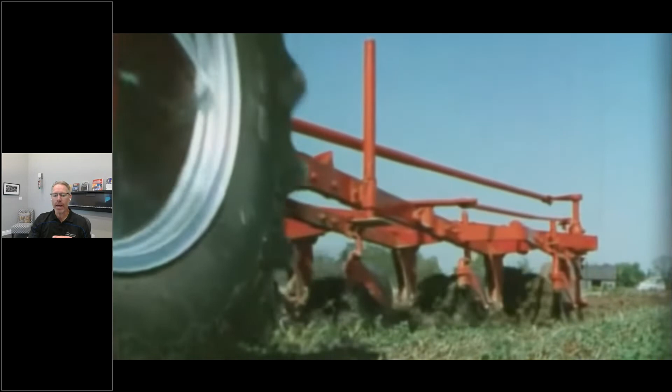My name's Alan Rienstra. I'm the Director of International Business at SDT. In my career, ultrasound is the only thing I've ever done. After 31 years, I imagine it's all I'm ever going to do. My love affair with ultrasound began back in 1991, and this would be the first time I ever picked up an ultrasound detector. It was an old SDT 150, and incredibly, these things are still out in the market being used 30 years later. I used that thing to listen to the intake valves inside the Perkins diesel engine of my dad's tractor.

The next 30 years I've just had amazing discoveries. New applications just keep developing for this versatile technology. Today my passion for ultrasound is going through a bit of a transformation. I don't spend so much time in the field anymore doing sales, but I put a lot of my accumulated knowledge to work developing courses, making presentations like this one, and helping you get the most from this technology that creates safe workplaces, reduces unplanned downtime, eliminates wasted energy, and helps us all create that elusive culture of reliability that everybody wants for their organization.

Machinery lubrication remains the single biggest factor affecting asset reliability today. If you speak to experts on the subject, or look it up on the web, or attend a conference, you'll hear most experts cite that as much as 40 to 80% of bearing failures are rooted in poor lubrication practices.

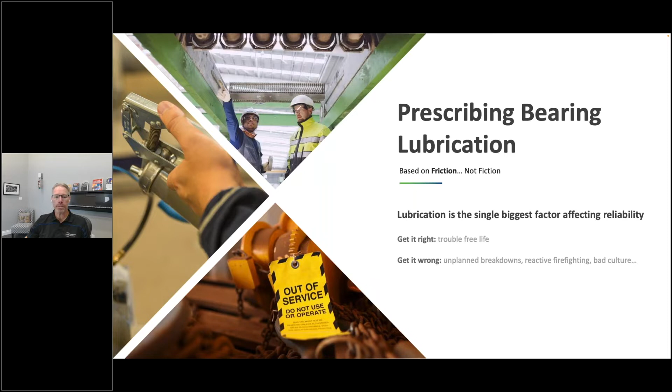Getting this one proactive task right can contribute to a long, trouble-free life for your bearings. But if you get it wrong, and so many of us do, you can expect unplanned breakdowns, reactive firefighting, your resources will get quickly drained, and a culture of unreliability will spread throughout your organization. There's nothing worse than an unreliable culture, because it is the single hardest mountain for any organization to try and move.

And so here begins my story. I like to use once upon a time because everybody loves a good fairy tale. Once upon a time is a great way to begin a tale that can recapture our memory of days that seem long ago and forgotten.

But it's not all that long ago when our lube technicians were considered the mechanical gurus of the facility. With precision, these old timers would inject the oily lifeblood into the assets so critical for manufacturing. They were the first responders, but their job wasn't to fix and repair because they weren't always in reactive mode. Their job was to maintain. These were the people that had their finger on the pulse of the plant, and they knew when an asset was healthy, and had a sixth sense for when trouble could be looming.

But gradually these gurus disappeared and they weren't replaced. Coincidentally, it happened at about the same time that manufacturing industries were making the transformation from time-based maintenance tasks to maintenance tasks driven by condition-based evidence. Many plants began using vibration analysis and infrared thermography to predict when machines might fail. But what they overlooked was the fact that lubrication is actually the earliest signal that their bearings were failing.

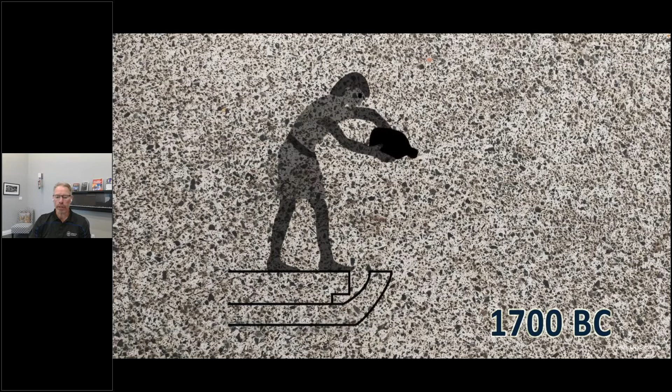So what was their evidence? Their evidence was friction. There was an increase in friction. It became too hard to push the sledge, so they just poured more oil in it. We could build a flimsy argument that the Egyptians actually invented condition-based lubrication. They didn't invent ultrasound. They didn't know it existed.

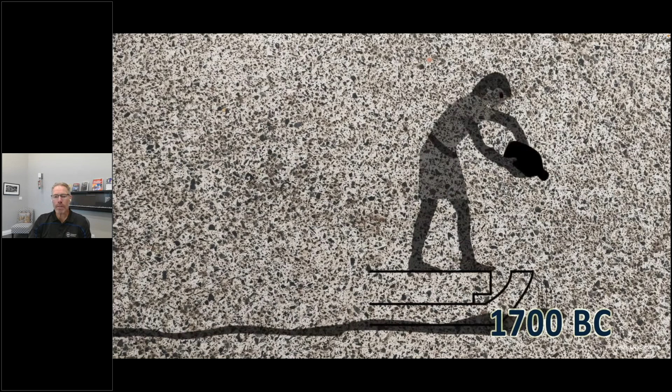What happened 4,000 years ago to now? We just stopped using it. When non-lubricated or improperly lubricated surfaces come in contact with each other, friction is created. And in many cases, this friction is an energy waster, as well as a heat generator.

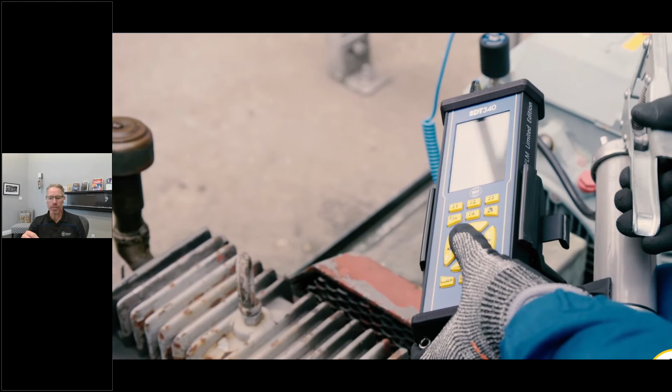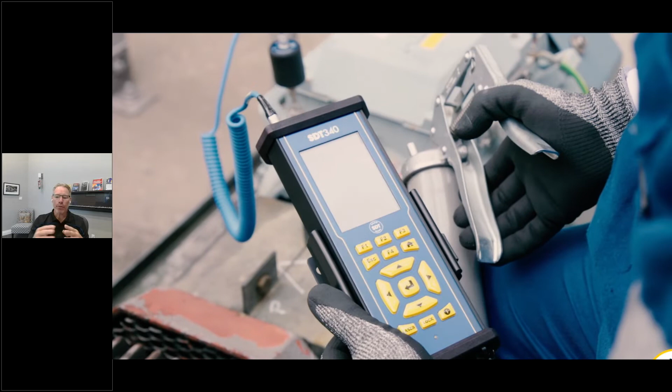Pouring a steady stream of duck fat or olive oil onto the surfaces used to be the best solution we had. But times have changed and applications have evolved. Lubricating the bottoms of a sled so it can slide easier along the ground doesn't require the same precision as maintaining that thin film of lubricant we need in our modern day rolling element bearings. For a sledge or a cart, too much grease is okay because the excess just squeezes out the sides. The Egyptians didn't even have to worry about the Environmental Protection Agency coming and inspecting all of the oil contamination that they would have left.

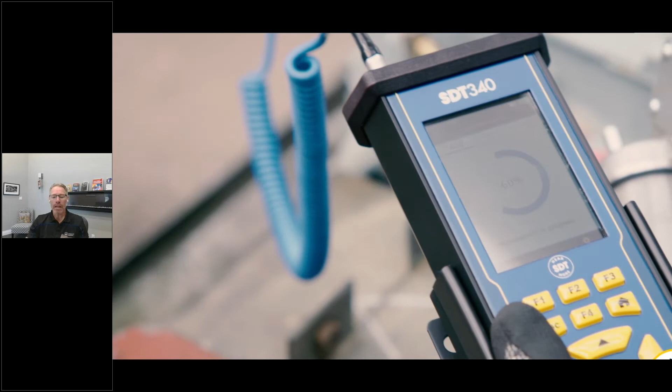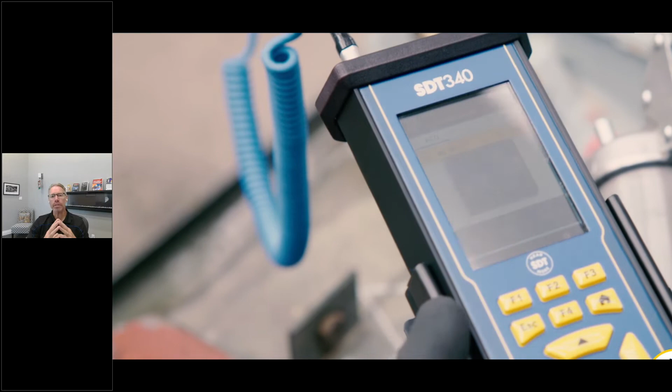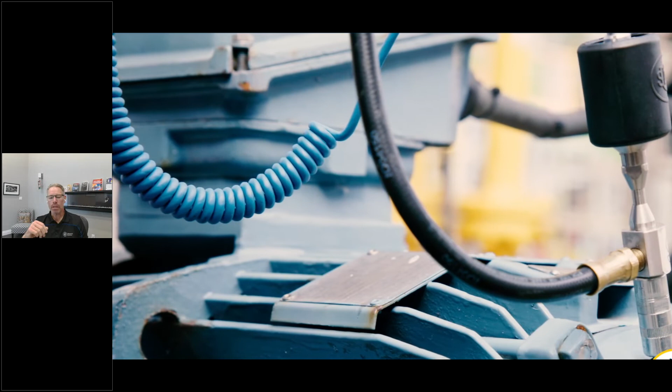Let's fast forward to today. When we add grease to a motor bearing until it pushes out of the seal and onto your work boots, that's not the best measure of correct grease replenishment quantity, is it? With today's loads and speeds, a dedicated oil pouring person is a really poor solution. And so is using a calendar and an interval calculator to schedule relubrication tasks. It's 4,000 years and counting, and industry is still seeking a workable method to determine when and how much lubricant to use to maintain perfect separation of surfaces.

Well, we often use statistics to help us make our story, contextualize our story. We can frame or manipulate those statistics to suit our inquiry.

For rolling element bearings, it's a well-established fact that poor lubrication practices are the leading cause of premature failure. As I said earlier, as much as 40 to 80% of reliability issues are rooted in poor lubrication practices. Now, 40 to 80% is a pretty big spread.

Let me explain, not every industry is the same. Some industries are more rugged and more durable and more difficult than others. So when you get into these really difficult industries, especially one with a lot of high vibration, because there's nothing that kills that lubrication film quicker than excessive vibration.

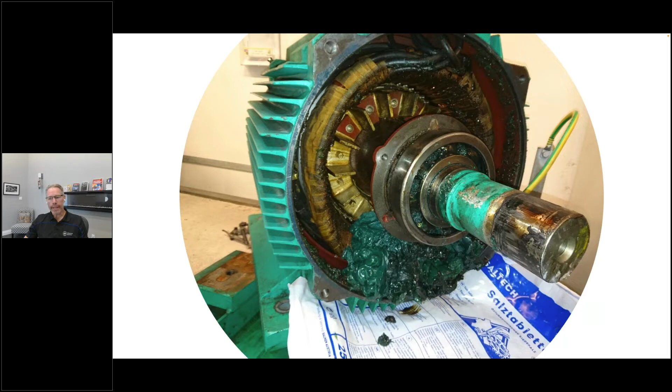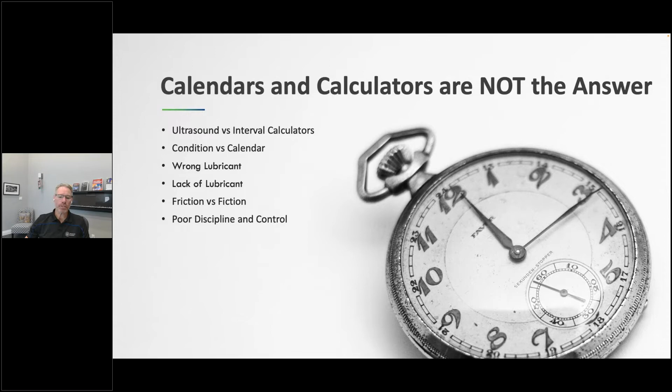But you will get anywhere from 40 to 80%, that being my point. Whether you're using the wrong lubricant for the application, you can have deterioration of the lubricant, lack of lubricant, or too much lubricant, or contamination, which could result from poor injection practices. It can also result from poor storage. A lot of times contamination happens in the storage room where you keep your lubricants. Sadly, contamination sometimes happens before that lubricant even arrives at your facility. In any case, all of those failures can be traced back to poor discipline and control over this important proactive task.

So then the question I have to ask is, why is it that only 5% of maintainable bearings will ever make it till their L10 life expectancy? Hopefully everybody knows what the L10 life expectancy is, or what I mean by that. If not, you ask about it later and I can explain it in the Q&A. But the answer to the question, why do only 5% of maintainable bearings make it to their L10 life, is poor lubrication practices, such as the ones I just mentioned.

Wrong lubricant, mixing incompatible greases, deterioration of the lubricant, oxidization of the additives, and inadequate time intervals between replenishment. If you're using a time-based regimen and you don't have the intervals scheduled properly between lubrication tasks, and that can be too short or too long, then that's also going to play on it. So all of these things have to be considered.

But there's also a bigger answer to the question about why only 5% of maintainable bearings make it to their L10 life. And that is because we allow it to happen. We accept it as a cost of doing business because management doesn't always see the bigger picture. The cost of a failed bearing is always much, much higher than just the cost of the bearing. A $35 bearing can cause $1 million in damage.

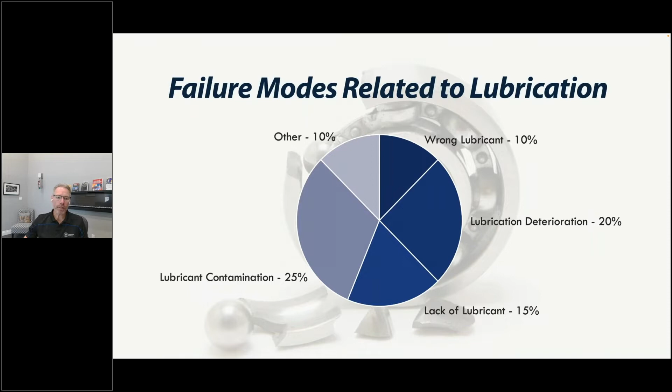Another question then, why do we lubricate? Seems like a pretty simple question to me. Why do we lubricate? Yet when I ask that question, the answers I always get are not the same. Some might say, oh, well, we lubricate bearings to fight friction, Alan. That's true. Yeah, sure, that's true. We do add grease to an asset's moving parts to reduce that friction.

But there's more to it than that. Some might answer that we do it to reduce heat. That's also true. Although if we put too much grease in the bearing, we remove the bearing's ability to disperse heat, but that's another topic. The right amount of lubricant does help keep moving parts from getting too hot.

But some lube techs think that more is better. So they take it to the extreme. They add more grease, thinking they're doing good. And instead what happens is they choke the machine's ability to disperse the heat. The real reason to lubricate assets is to form that separation between surfaces, that thin little wedge of oil.

And this logic applies not only to motor bearings, the pistons in an engine, the chains on a chain drive, gears in a reducer, even linear bearings that slide back and forth. They don't rotate, but they still have friction and they still need to be lubricated. And then sometimes you'll have a bearing that just oscillates back and forth. It's not doing a full rotation, but there's still friction and it still needs to be lubricated.

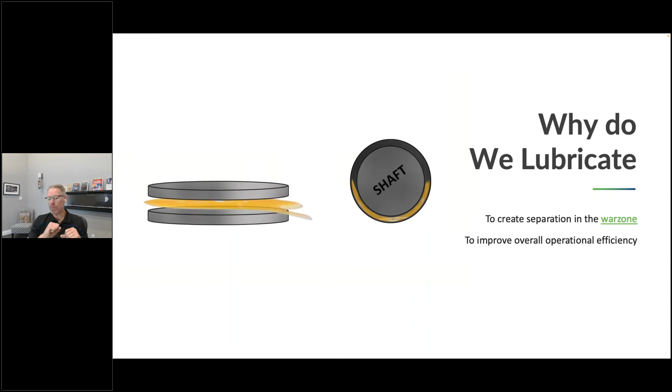Now, I mentioned something called the war zone. And I'm not talking about Russia and Ukraine. I'm talking about that part of the bearing where the rolling elements meet the raceway and the cage. We talk about the region of the bearing where the lubrication mechanism does its most important work. And that's where the base oil bleeds from the thickener to create that thin hydrodynamic film of component separation, just like we see in the graphic here.

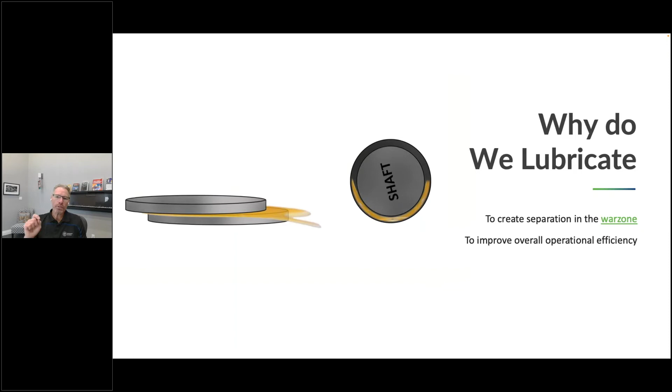So that's clear. When we lubricate bearings, and more specifically when we grease bearings right, we achieve low friction, low temperature, and bearings have the best possible chance to exceed their engineered lifespan. So our goal has to be to achieve that perfect lubricating film and maintain it, but unfortunately, it doesn't last forever. If it did, we wouldn't need this presentation, we wouldn't need ultrasound, and we wouldn't need lube technicians. We could just set it and forget it. But that's not our reality. Grease is an organic compound. And just like all carbon creatures, including us, grease ages and eventually it dies. So we have to replenish it.

But there's a higher reason to grease bearings right, and it has nothing to do with what I just talked about on that last slide, separation of components. Proper lubrication can remove up to 80% of our reliability problems, which in turn allows our organization to thrive, to achieve its operational objective. If you want to get the attention of your manager, if you want to get sponsorship and funding to fix this lubrication problem, then the way to do it is to show them that the real benefit will be to your bottom line. More output, more productivity, less unplanned downtime, fewer angry customers, fewer parts in the storeroom, less grease being wasted, and a culture of reliability that everybody can get behind, that everybody can be proud of.

When I say we've been getting it wrong for 4,000 years, that's not to say that the calendar-based methods were mistakes of our past. They were the best solution of a prior era. But today we know better, and we have better technology to support advanced decision-making. It's called ultrasound, and it offers us the ability to finally grease bearings right.

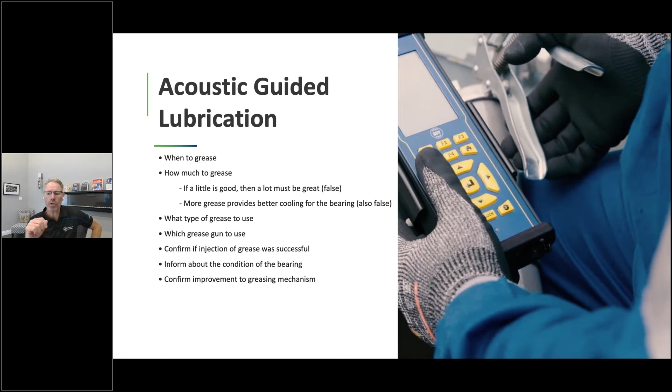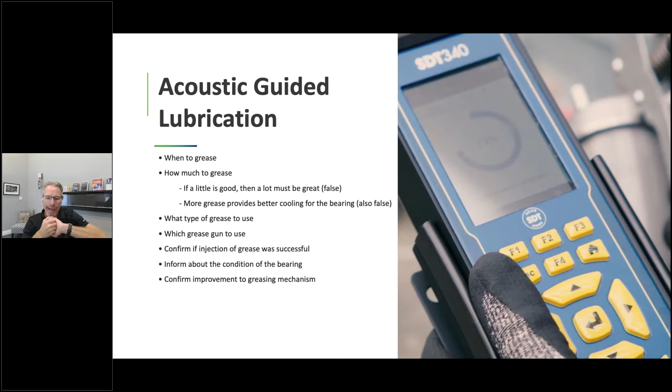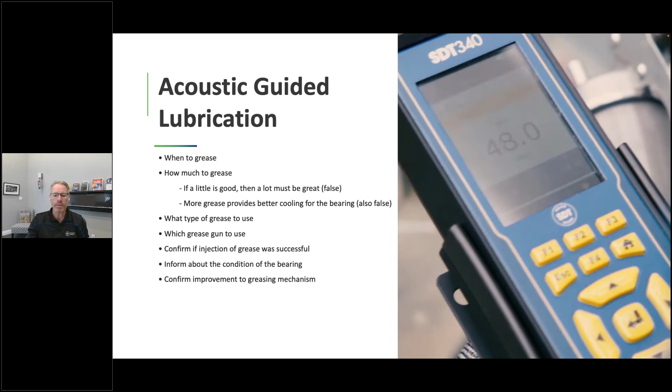Now we look at the phases of lubrication. What happens when we inject fresh grease into a bearing? Understanding the churning and the bleeding phases of grease replenishment is critical in tying together the role that ultrasound plays in ensuring we finally get this right. And by right, I mean a solution that provides guidance at each step of the grease replenishment task. A solution that tells us when to grease, how much to grease, which type of grease to inject, which grease gun we should use for the injection on a specific bearing, to provide confirmation that the grease actually reached the bearing, because it doesn't always, and to confirm that the task actually improved the lubrication mechanism, because we know all too often that maintenance PMs can make the situation worse, not better.

But there's really three things you need to do, and it's three simple questions when you approach a bearing. The first thing I would say is, hello, Mr. Bearing, how are you today? Do you need grease? So I'm not even going to approach my bearing with a grease gun. I'm going to approach my bearing with ultrasound, and I'm going to take its pulse. I'm going to collect some data, and I'm going to say, how are you feeling today? If you're okay, I'm going to leave you alone.

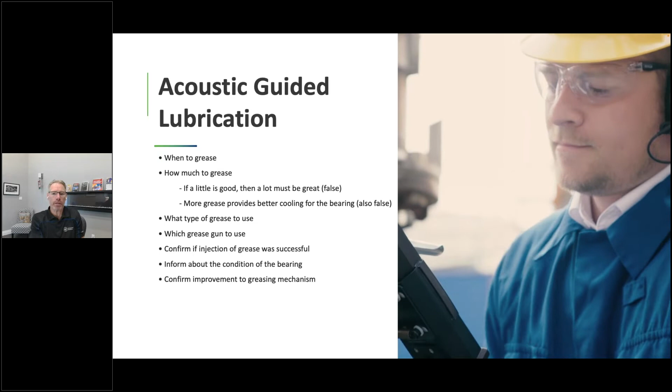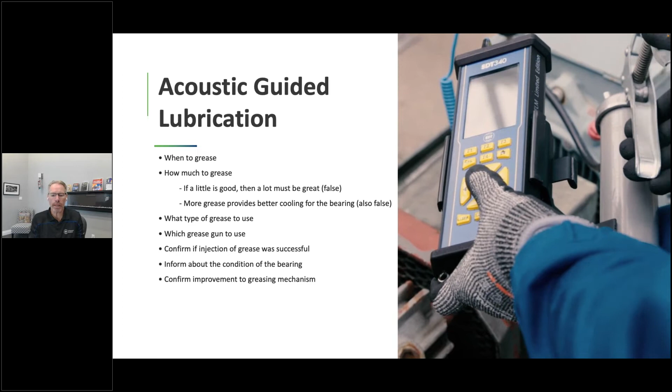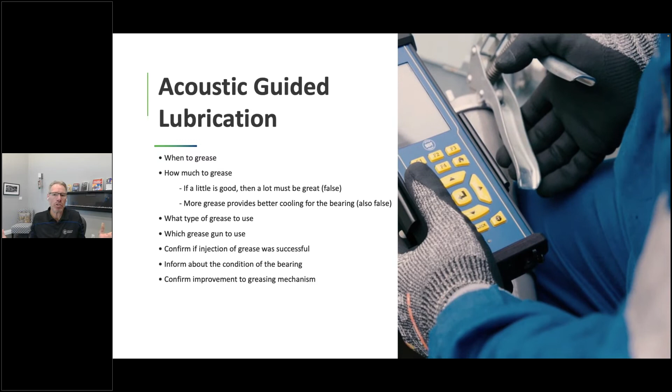Even though my PM tells me I'm supposed to inject grease because 2,000 hours has gone by since the last time I did it, I'm going to leave you alone because you're just fine. And that's the mistake that we make. So question number one, do you need grease? Question number two, if it's a yes, how much? Well, we have a calculator for that, but that calculator might not be right. It is based on some scientific evidence, but if the interval between lubrication cycles is too short or too long, then the injection quantity on the replenishment will also be wrong.

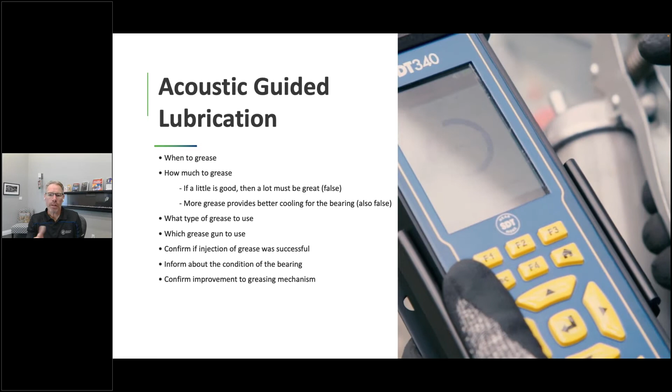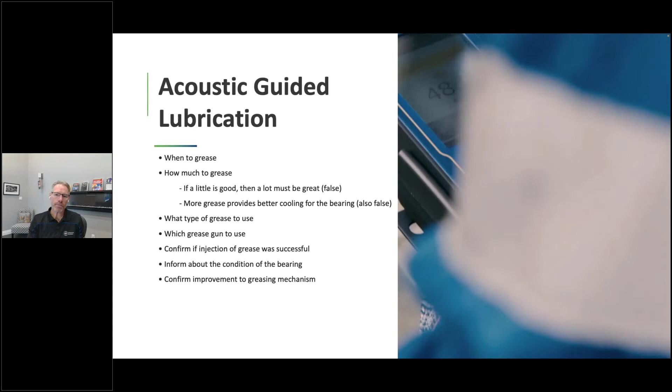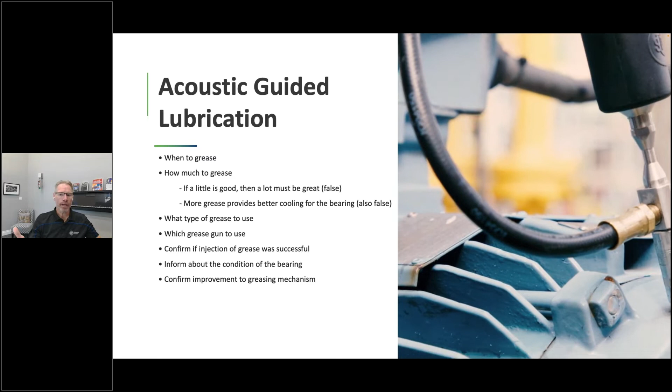So in theory, the dimensions of my bearing may tell me that I should inject 50 grams of grease, in theory. But what if 20 grams of grease makes my bearing smile? If I can stop at 20 grams, I've done my job. And then if I can look at that data and say, all right, so 20 grams did the job. So for the next interval, instead of coming out at 2,000 hours, I'll come out at 2,200 hours. And then we'll compare the interval to the next injection quantity.

Because all I'm going to do is, again, first question, hello, Mr. Bearing, how do you feel today? Do you need some grease? Yes? How much? Okay, here's some grease. And then the third question, did I make you feel better? Did I leave you in a better condition than you were when I came to you? And sometimes the answer to that is yes, and all you did was come and walk away and you didn't do anything to it at all.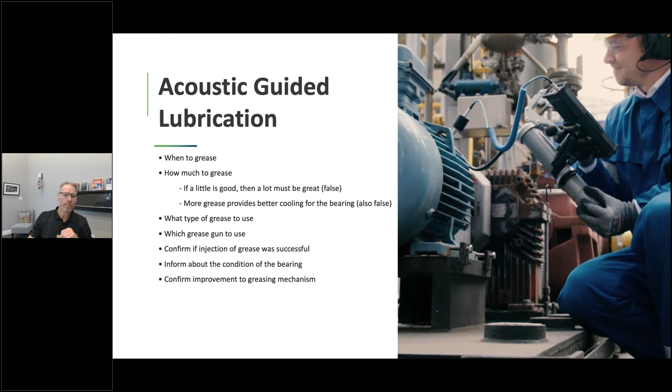Assessing the cause and effect of failure modes is a scientific approach to help us determine which technology is the best fit for identifying failure modes. And knowing which of those defects can be detected with ultrasound can save a lot of time and frustration. There's not much point in using the wrong technology to uncover a defect. Vibration analysis in the hands of a very well-trained, experienced technician can be used for lubrication. Ultrasound in the hands of somebody with minimal training, but a good concept of what good lubrication practices are, can net results much quicker with less cost and a lot less complexity.

Ultrasound allows us to hear above the noise of the factory floor. By screening out low frequency sounds, inspectors can hear sounds consistent with machine system defects. And these defects produce ultrasound from 3 phenomena. The first one starts with an F, and it's friction. The next one starts with an I, and it's impacting. And the third one starts with a T, and it's turbulence. Friction, impacting, and turbulence. If the failure modes of your asset produce any of these 3, then ultrasound is the right fit for your reliability and condition monitoring program. And by the way, about 90%, 95% of the failures that will hit your facility all produce friction, impacting, and turbulence, which means that ultrasound should be your front line of defense against unreliability.

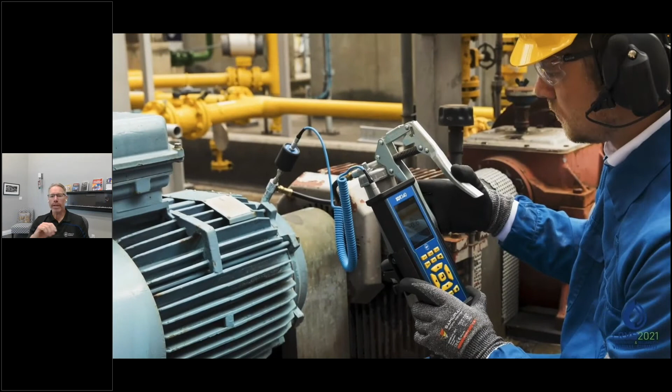It doesn't exist. Our goal must be to create a team of well-trained lube technicians in as short a time as possible. Ultrasound has a short competency curve, but machine relubrication goes far beyond just learning how to push the buttons on the device, because it's not a device, it's a solution. Once we've created competent lube technicians, we also have to ensure that they're capable of executing on that solution. How can we do that? We do that by providing equipment, training, and a culture change that instills discipline and control over this most critical proactive task. And most importantly, we provide autonomy for them to think on their own.

Some of the things we want to consider before we approach an asset: is the asset safe to even access? Because a lot of times you'll come up to an asset, expected to collect some data or to inject some lubrication, and there's something there that just doesn't suit your eye. As a technician in your facility, are you empowered to skip over that asset and say, sorry, I'm not going to do that today. It's dangerous. It's too dangerous to move forward.

Well, we say you should be able to do that, but you still need to be able to say why. Why didn't I do my job today? Well, if it wasn't safe, fine, but there needs to be some kind of a messaging system that allows you to report that back to the team.

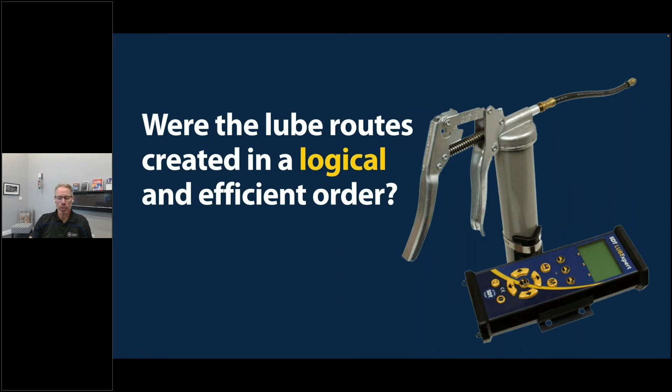It's important that you create lube routes with a logical walking order that's efficient so that you're going through the plant as quickly as possible. So there's a lot to consider in what I've just said.

Now, what I'm going to go through is maybe 5, 10 different features that I think you should look for if you're considering starting an ultrasound guided condition-based lubrication solution. These are, to me, the extras that SDT has put into their LUBExpert solution, which makes it stand head and shoulders above. I hesitate to do this because I want this to be educational and not a sales pitch. So I'm going to try and present these in a non-salesy way, but in a way that makes you go, okay, well, that's a good thought. So first one,

does your acoustic lubrication solution remind you to inject the correct grease type? Because we all know what can happen if you mix incompatible greases. And I remember a story a guy told me, I don't remember his name or exactly where he was from, but I know he was in a water wastewater treatment facility in Southwest Florida.

And they had a summer intern come in and they were trying to give him busy tasks. So they gave him some lithium grease, no, it wasn't lithium, it was another type of grease. Anyways, the type of grease doesn't matter. The point is that his job was to go out during a shutdown and lubricate all of the grid couplings on their water pumps, and just do that and nothing else. So away he went with his graphite grease, and he greased all of the couplings on all of the water pumps he was told to do.

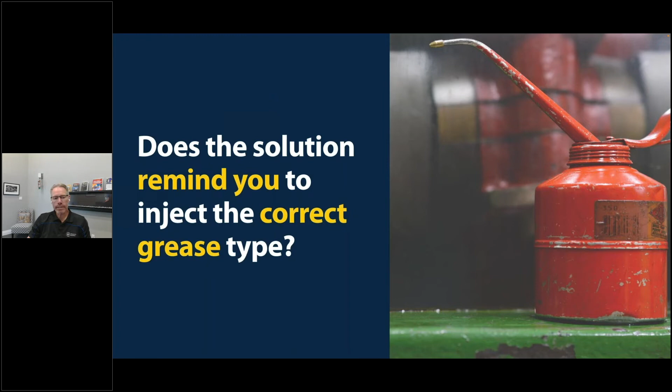And he said, well, I really want to show I'm going the extra mile. I'm already here. Why don't I grease the pump and the motor while I'm at it? And they ended up putting graphite grease into the drive end and non-drive end sides of the pumps and the motors and the couplings. Well, the only thing that survived from that, you can imagine, will be the couplings themselves. The rest they had to flush out. Okay, good intentions, but bad education.

You should never assume that two grease guns are the same, even if they have the same part number, or they come from the same manufacturer, the same supplier. So you have to validate your grease guns. And I don't mean calibrate, because you can't calibrate a grease gun, because calibration means that you changed its state from before to after. But we can validate our grease guns because the LUBExpert solution from SDT wants to know that every shot of grease is the same, and they want to know how much that shot is. So it's real simple.

You just get yourself a digital weigh scale. You could get a newspaper or a piece of paper towel, put it on the scale, tare it, give it 10 shots of grease, add it all up, divide it by 10, and now you know the average shot quantity per injection of your grease gun. You have to do it for all your grease guns. You can't assume they're all going to be the same.

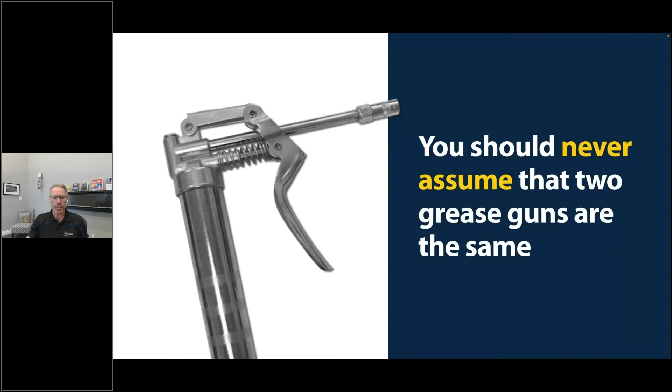And when you're setting up your lube routes in our software, it's going to ask you, which grease gun are you going to use? The green one, the gray one, the black one, grease gun number 001, whatever. Okay, great. And how much grease does it inject? So you need to be prepared for that information.

Does the ultrasound meter know what type of bearing is installed in the motor? Well, only if you tell it. These details are critical to the lubrication quantity calculation, the replenishment quantity, and of course, determining if the bearing should even be maintained in the first place. Because a lot of the bearings out there are non-greasable, right? They're sealed for life. We're only worried about the 5% that are actually maintainable.

But in order to set up your lubrication program, the LUBExpert solution wants to know the bearing number, therefore the bearing dimensions, so that it can calculate the replenishment quantity, but also the amount for each injection. Because, like I said, if we're going to inject 50 grams of grease, we're not going to inject 50 all at once. We're going to inject a portion of that 50. We're going to measure and see, and then the next, and so on. So it's important that your ultrasound solution insists on knowing what the bearing number is.

The running speed's also critical to calculating the replenishment quantity. You know, a slow speed bearing has completely different needs than something that's turning at 1800 or even 5000 RPMs. So your ultrasound software has to ask, what's the RPM of the asset? Because that's part of the calculation in determining what the initial injection quantity is going to be. Again, if it's 50 grams is the total quantity, we might only inject 30% of that on the first injection. The RPM plays a role in that calculation, and it needs to be asked and it needs to be known.

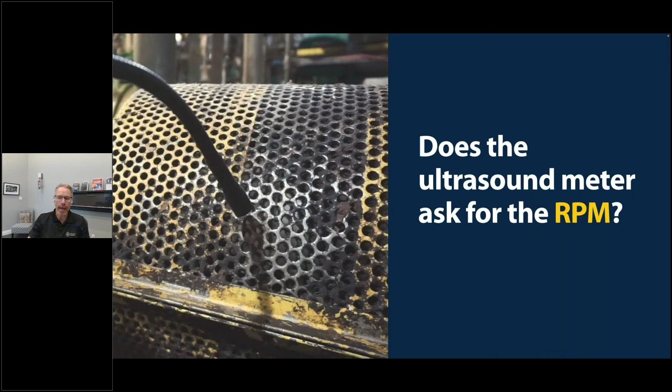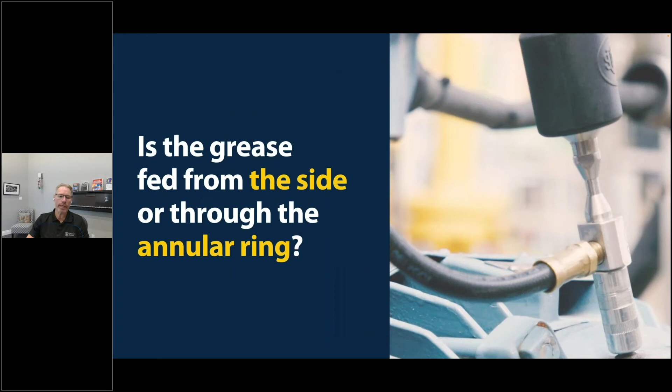And if it can produce a list of just those bearings, then it should also be able to produce a list of how much grease you're going to need, the types of grease that you're going to need, and the quantities of each type, as well as which grease guns to bring with you. And so what if your software could print out a report that says, hey, on your way out to grease those bearings, stop by stores and pick up 200 grams of this grease type, 300 grams of that grease type, and the black, the green, and the orange grease gun.

Rather than getting halfway into the plant and realizing that you didn't bring the right grease gun with you, or you didn't bring the right grease type, or you didn't bring enough. That's annoying, and that's a time waster. So make sure that your ultrasonic solution is smart enough to make sure that you don't forget to pick up the milk.

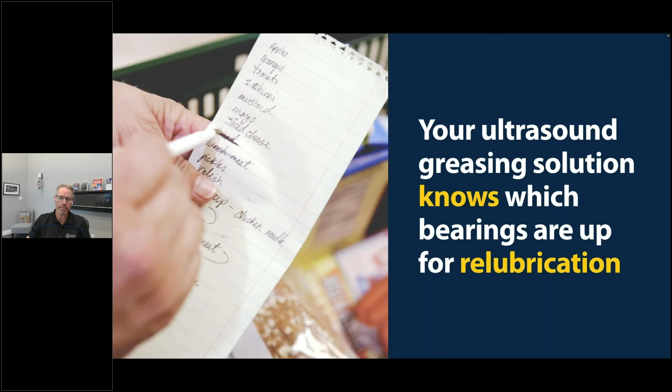It should also have a messaging system that allows the lube technician to communicate with the condition monitoring team, not only to feed them data about the bearing's health today, but why they skipped a machine. Maybe it was a safety issue, or the machine wasn't running. You can't just skip it without leaving a message—maybe the grease line was broken. You have to leave messages to maintain control, discipline, and communication throughout the entire lubrication, reliability, and condition monitoring team. Because now they're not siloed, they're not separated, they've all come together.

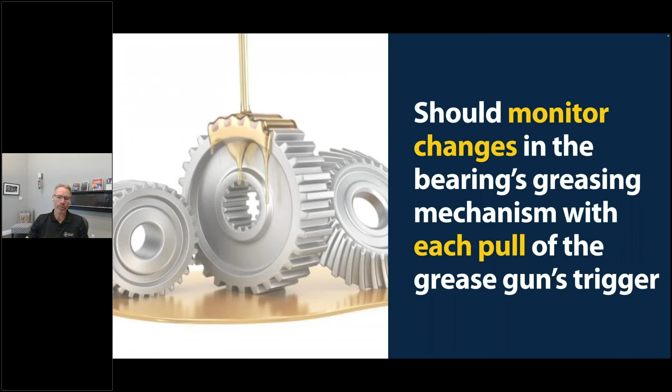Ultrasound-assisted lubrication solutions should monitor changes in the bearing's greasing mechanism every time you give a fresh injection. If you can't stop and check your progress with each injection, you'll end up over-greasing your bearings. By monitoring the greasing mechanism in real time, the lube brain can adjust the injection quantity on the fly, resulting in fewer over-lubricated bearings and a decrease in grease consumption per asset.

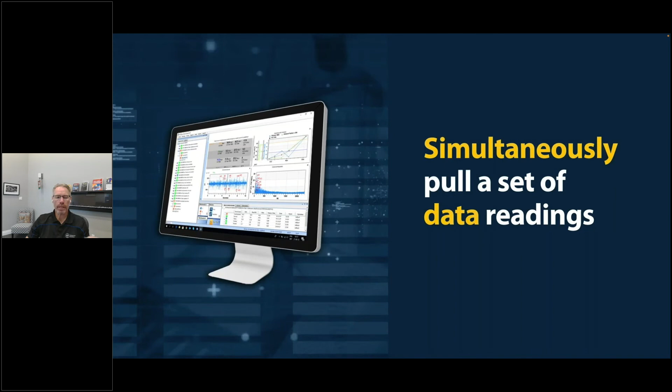And finally, if you don't document the task and share it with the team, it never happens. So you have to log everything, including the amount of grease injected, whether it was a successful or failed attempt to lubricate the bearing, the condition of the asset, and so much more. All of that messaging has to be done.